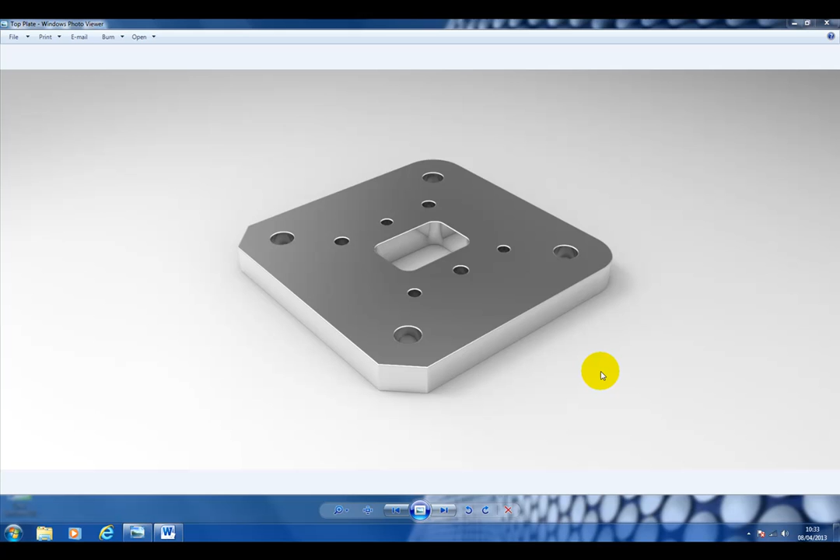The top plate is another really simple part that we're going to model, and we're going to use the hole command to model these holes. The holes, although they look similar, are different. This hole and this hole are M5, so they are tapped holes. And this hole and this hole are just straight 5mm holes.

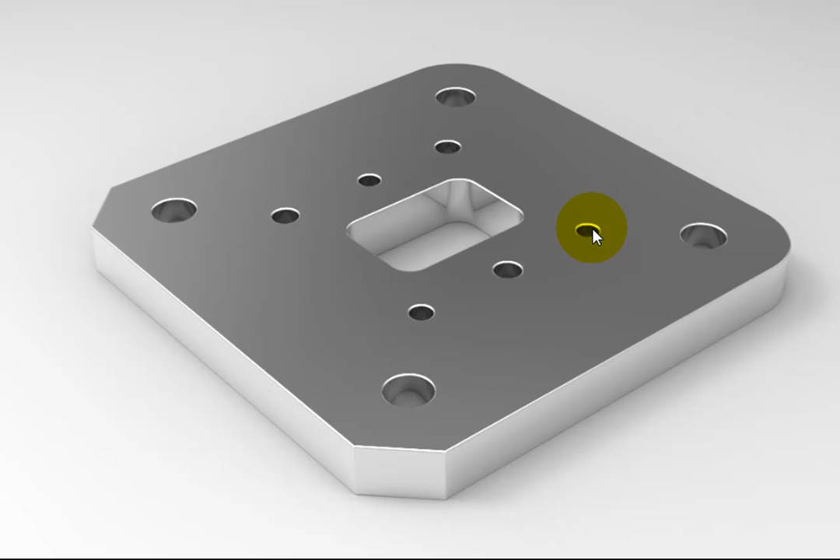We'll do this by using the hole command to produce one hole and then pattern it 6 times. Then we'll tell Creo that we don't want to use this hole and this hole. We'll do the same again for these following 3 holes, but this time we'll create this hole, pattern it 6 times, and tell it not to use this hole and this hole. We can then come back in and just create this straight cut through the center and put some rounds in the corners. Let's start Creo.

Make sure you select Creo Parametric. Once the program's started, maximize it.

I'm going to set the working directory. Select working directory, navigate to where your folder will be stored on the shared area. Mine's saved on the desktop. Select the press plate folder. Again, don't expect to see any parts in here, and these 3 folders I've got on here are just for creating these videos. Say OK to it.

We can now go to Open. Select the top plate and say Open. And it should open looking like this.

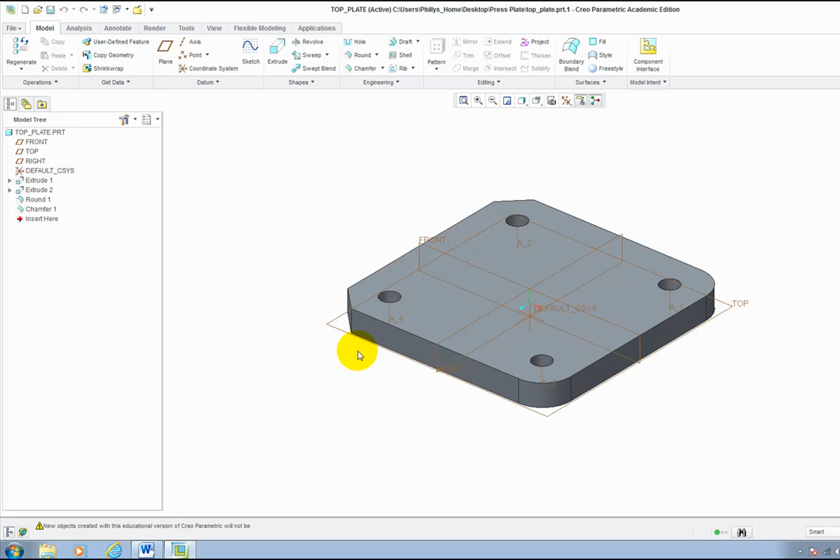Let's spin the part over so we can see it in a plan view. Go to named views and select Top. Scroll down if necessary, and then refit to the screen if necessary.

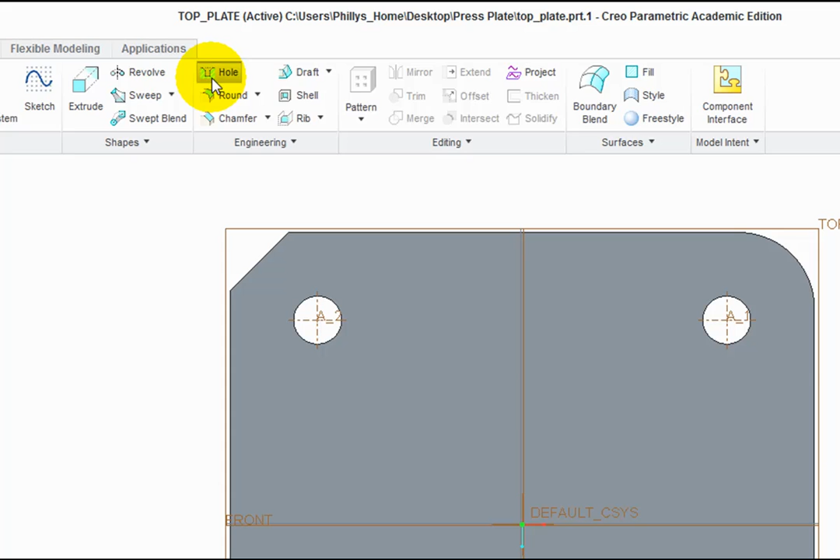We'll now put the straight holes in. Let's go to the hole command, select it, move the cursor down into this top quadrant here, and left click once just to position a hole. Again, you'll see we have the 2 green grab handles. I'm going to click and drag these.

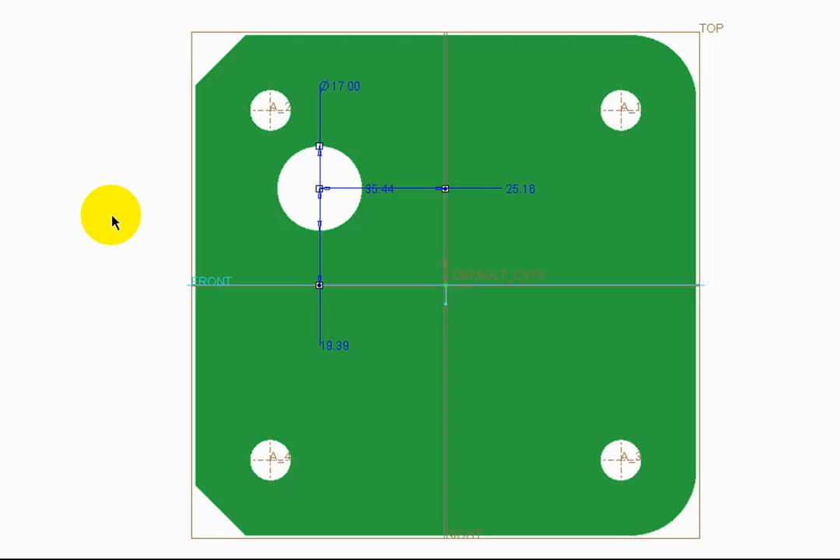Select it. I'm going to bring one down onto the horizontal datum plane. Select the other one, click and drag it, and bring it across to the vertical datum plane. I'm just going to press and hold on the wheel and move the mouse forwards to put the plate slightly on the angle so I can see what I'm doing. These holes should be offset from the reference or datum planes by 20mm. Hover over the value, double click it, change it to 20, and enter. Do the same with the other one.

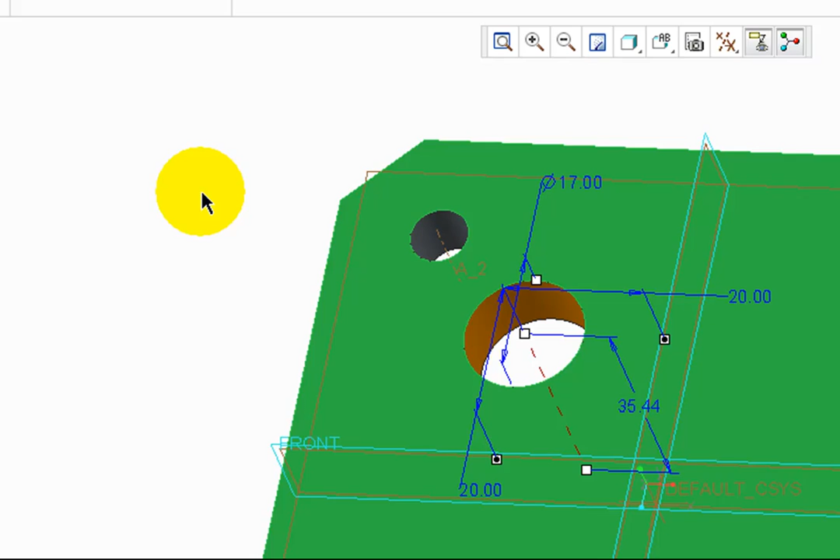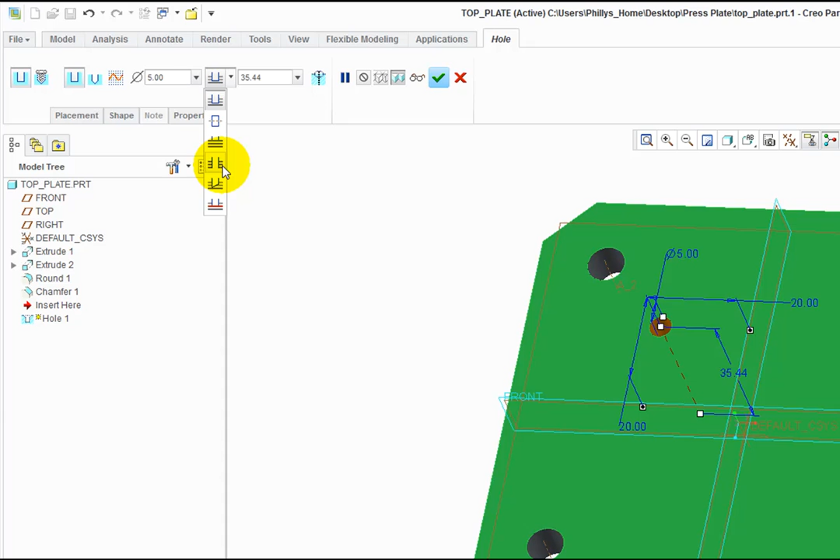We can then go into the dashboard to set all the other settings. It wants to be a simple hole, not a tapped hole. It wants to have a diameter of 5mm. Enter. And it wants to go all the way through the part. Green tick to accept it.

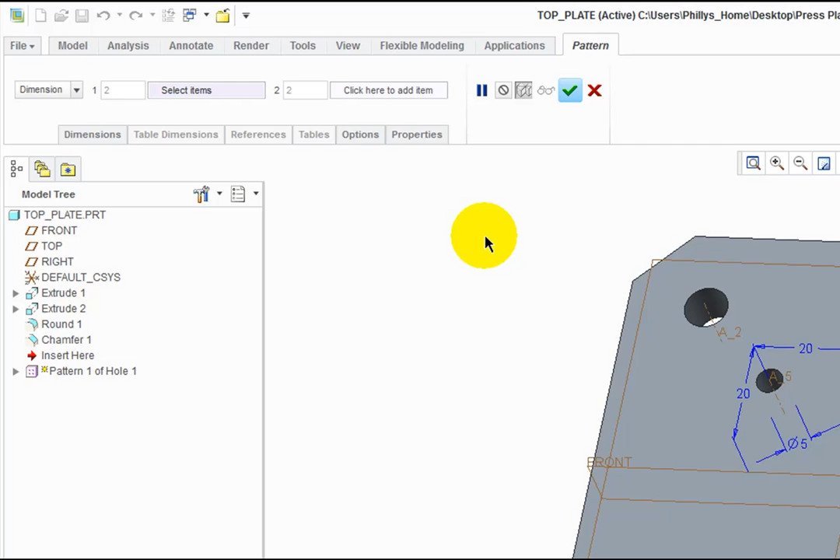While it's still selected, the pattern command is active. If not, select hole 1 in the model tree and then select pattern. We're going to change the type of pattern from a dimension pattern to a direction pattern. Select it.

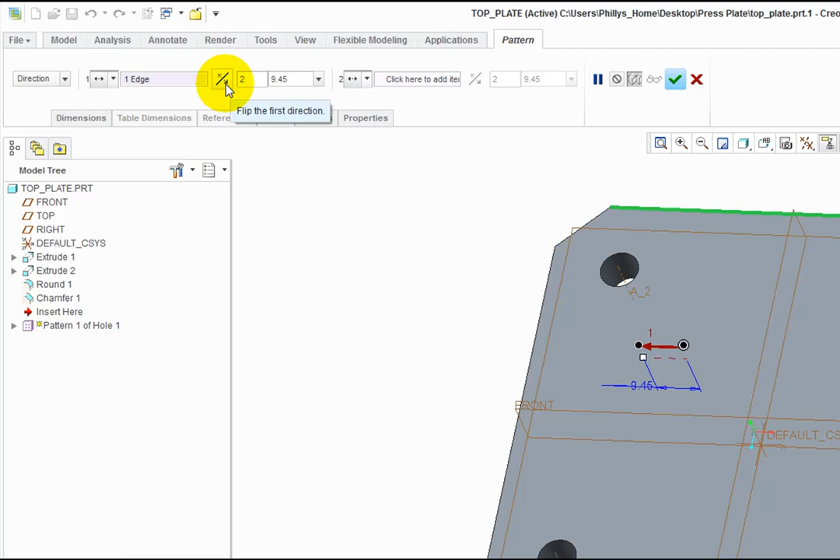This time we're going to select the direction that we want the pattern to move in, so I'm going to select this top edge here. If you go to the double-headed arrow, you can change the direction of the pattern if necessary. I want my pattern to go in this direction, to the right. I want them to be a total of 3. Enter. And I want them to be spaced at 20mm.

This gives us the 3 across the top, but I also want 3 that are down below here. So we can now go in and put another direction in. I'm just going to click into this box here to tell it I want to put another direction in. This time I'm going to select one of the vertical edges.

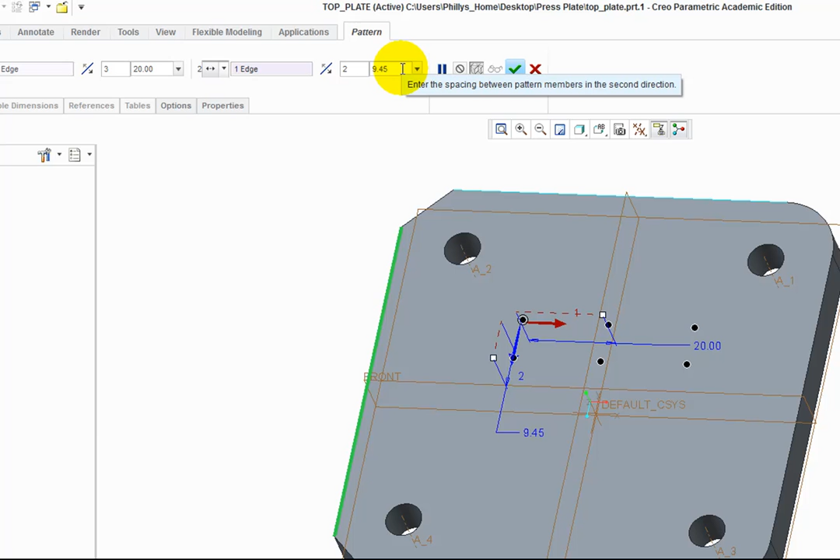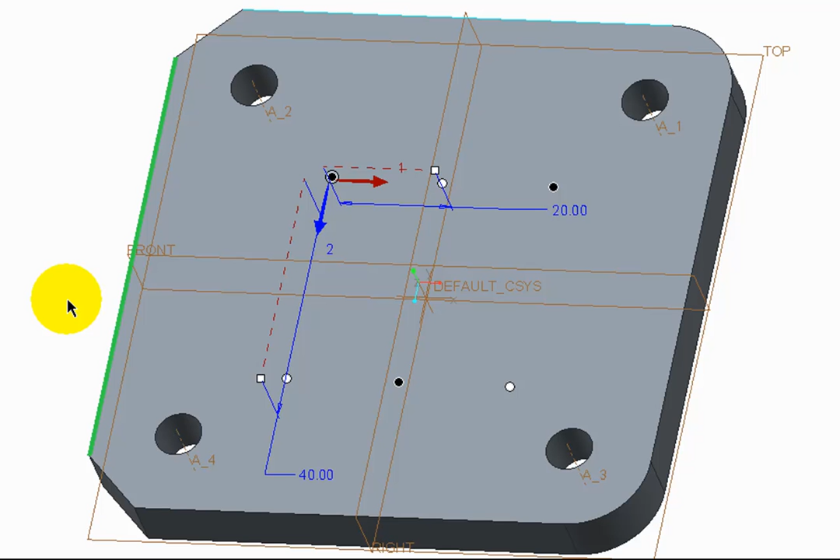Leave the number of repeats to 2, and this time change the distance between them to 40. This will give us 6 repeats, but I only need 3 of them. This is the simplest way I could think to do this. So I can tell Creo that I don't want to use this point in the center, left click onto it, this point down here, left click onto it, and this point down here, left click onto it. By selecting them, I'm telling the program that I don't want to use these points. I can now left click onto the green tick and click away in space to see what I've got.

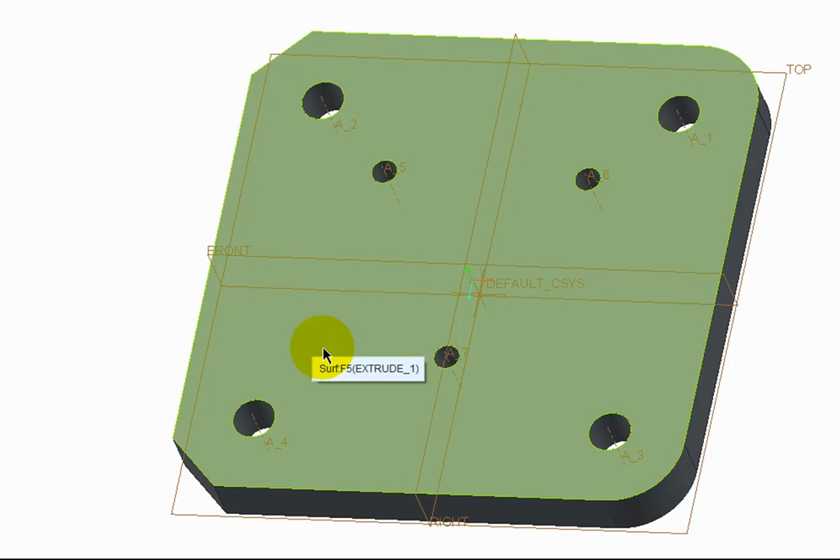So let's now come back in and do the tapped hole. Select hole. This time I'm going to come down into the bottom left hand quadrant, select it, get my grab handles again and drag them up to one to the horizontal datum plane, select the other one, click and drag it and put it onto the vertical datum plane. Again, change the values to 20 mil.

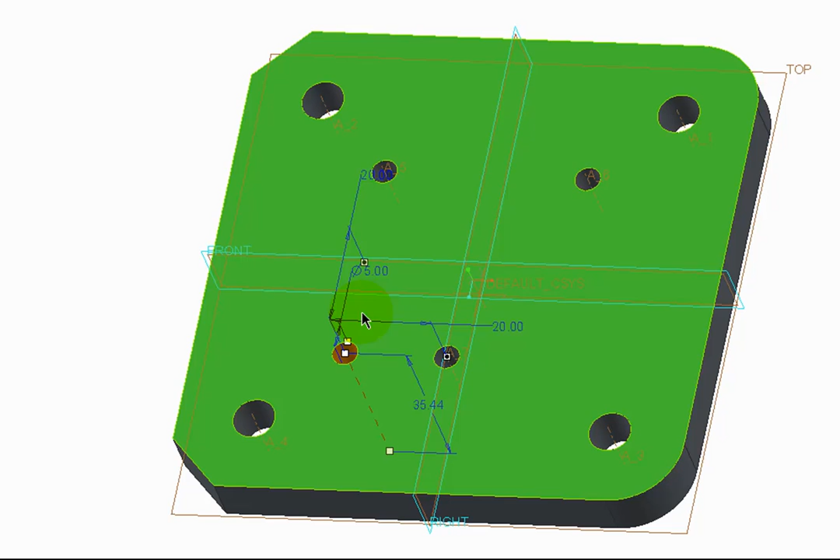Now go up into the dashboard to change what type of hole we need. We want it to be a tapped hole, select it. I'm just going to click onto shape so I can see what we're doing. I'm going to tell it we need it to be an M5 hole. Scroll down to it. It wants to be M5 by 0.8.

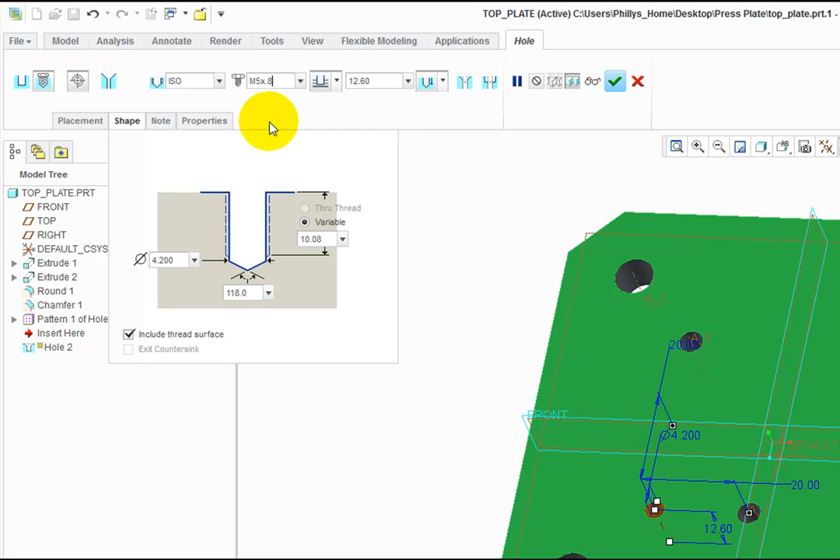I'm going to tell it to go all the way through the part. I need to tell it that I want the thread to go all the way through. Click on the green tick to accept it. While it's still selected, we can go to the pattern command. If not, just reselect, hole 2.

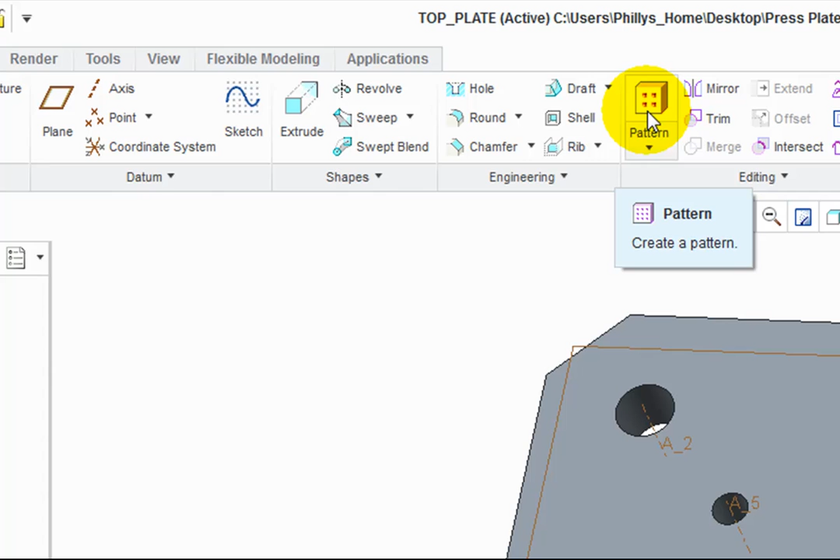Change the type of pattern to be a directional pattern. Select one of the horizontal edges to tell it we want to go left to right. Change the direction if necessary. Change the number of repeats to be 3. Enter. Change the distance between them to be 20 mil.

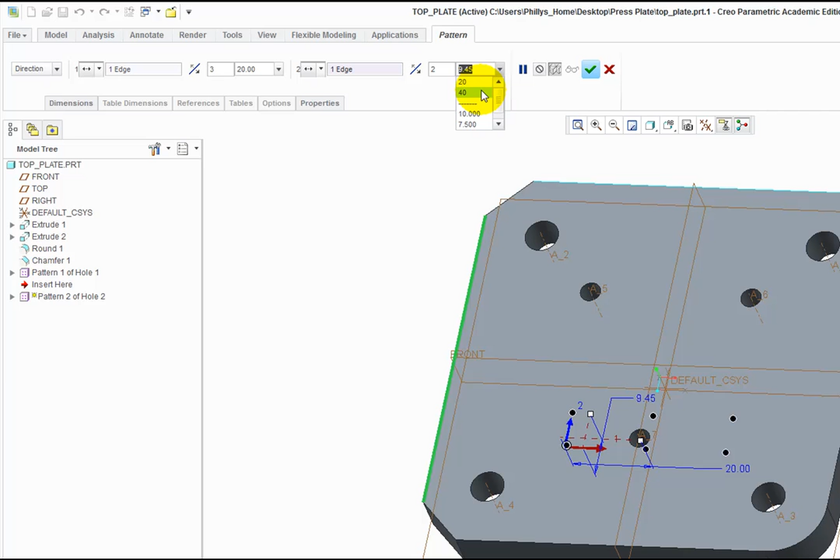So now tell it we want to put a second pattern in the vertical direction. Click into the box, select an edge, change the direction if necessary, leave the number of repeats to 2 and change the value to 40. This time deselect this hole, and this hole. Green tick to accept it.

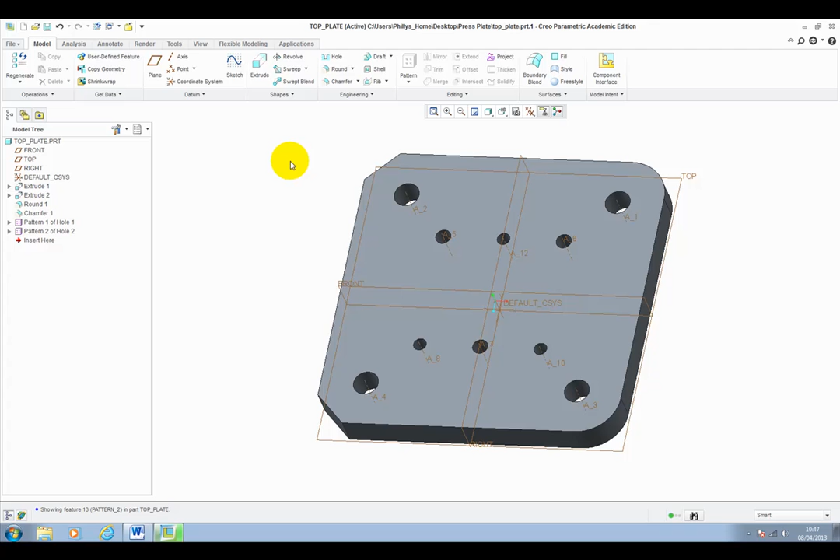Click away in space. Press and hold the wheel and move the mouse so you can view the holes. Return it to trimetric. Refit to screen.

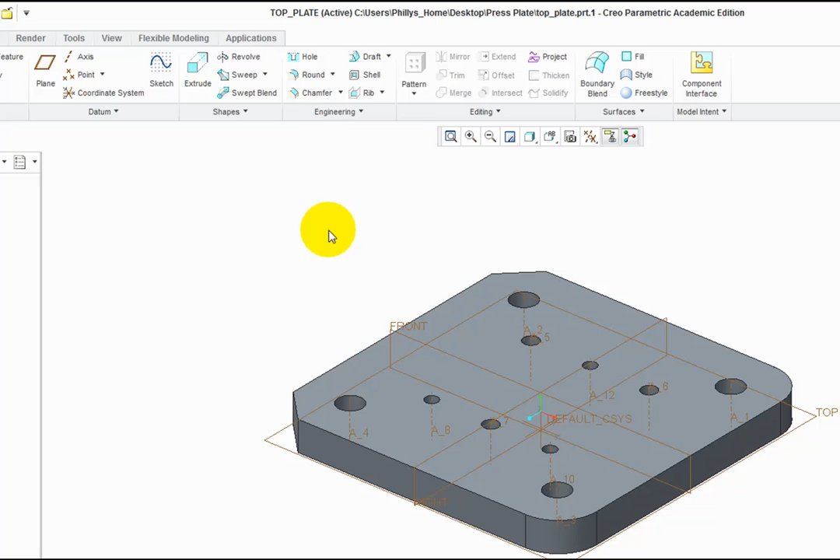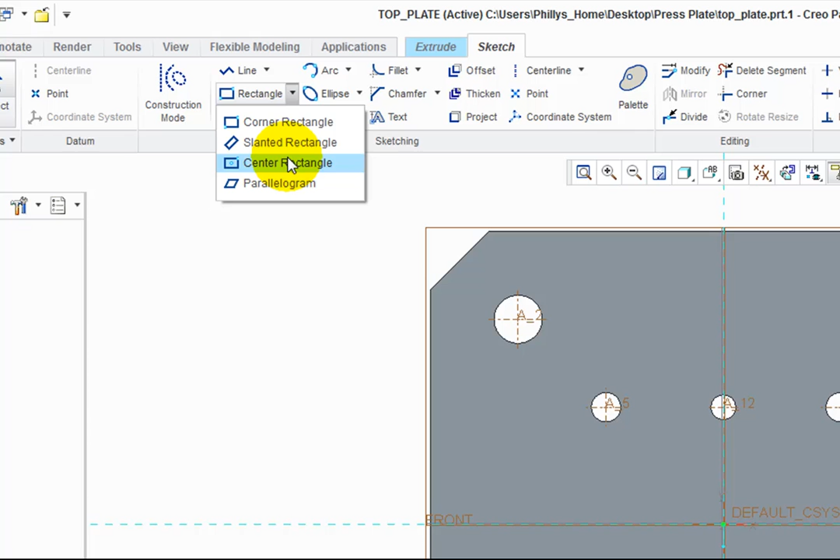So now come up with the square hole in the center. Go to extrude. Select top surface. Spin onto sketch view. The hole is just a simple rectangle. Just go and select rectangle, but change the type of rectangle to be a center rectangle. Let the cursor snap to the intersection of the 2 datum planes.

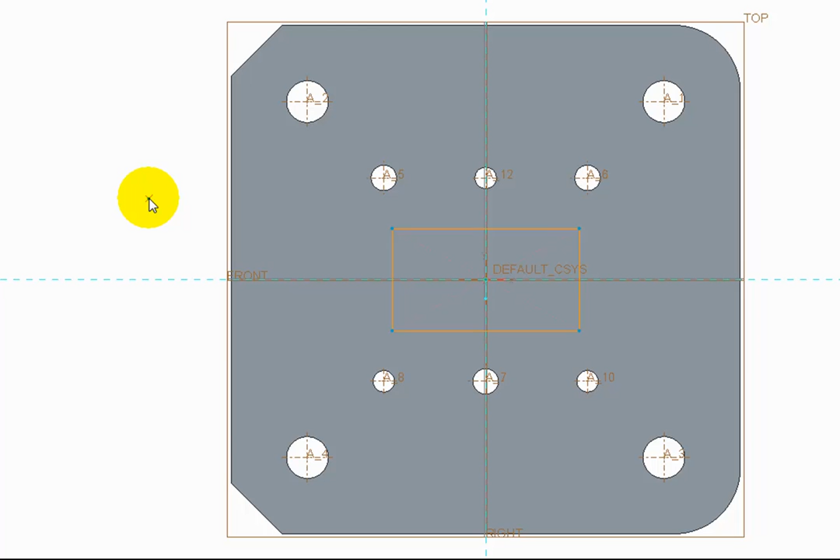Left click once to start a rectangle. Move the cursor out and left click again to complete the rectangle. Move the cursor into space and middle mouse. This will give us some values and some dimensions. Change the dimensions to be 20, enter, and 40, and enter. Green tick to accept it to take us back into the 3D environment.

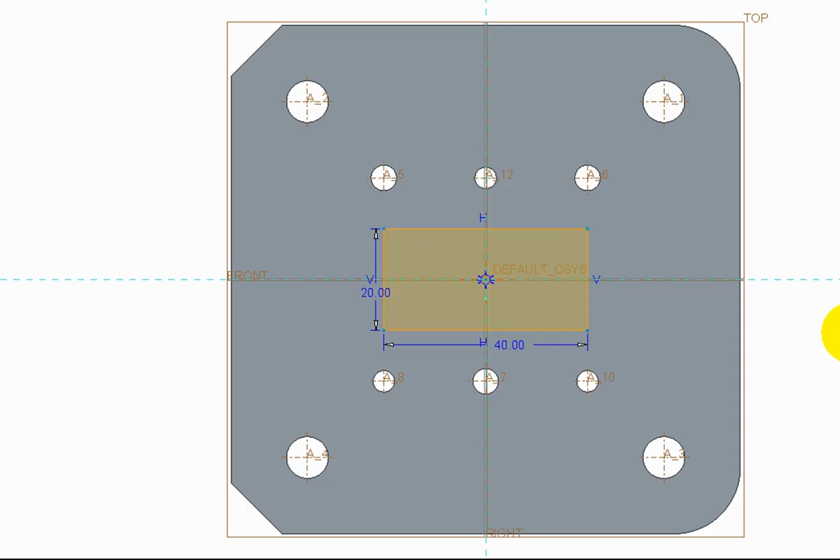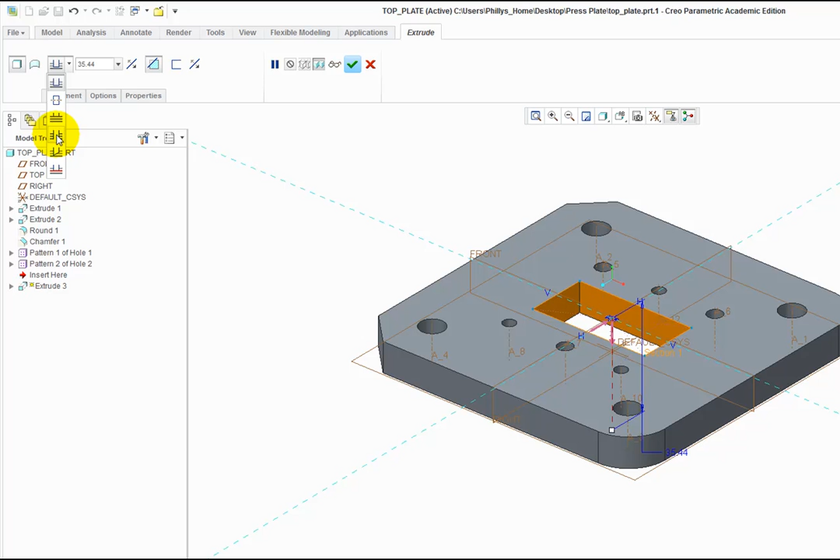Spin the view trimetric. Tell it we want the extrude to go the other direction. Make sure it's removing material. Tell the extrude to go all the way through the part. Green tick to accept it. Click away in space to deselect everything.

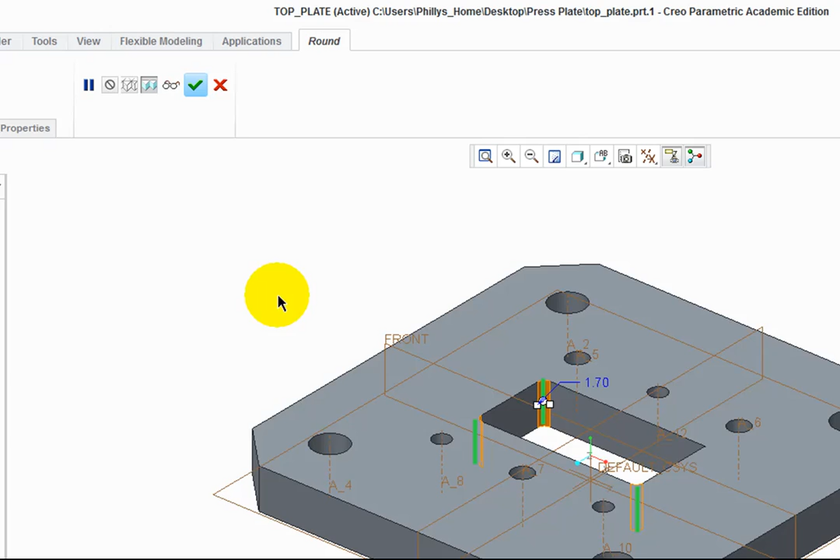Let's then just come and put a fillet in the 4 corners. Select round. Select the vertical edge. You can either hold the control key down and just move to where the edge would appear, left click onto it. Move to the next one. The green edge highlights, left click onto it. Or you can release the control key, press and hold the wheel, rotate the part over, then reselect the control key and select the final edge.

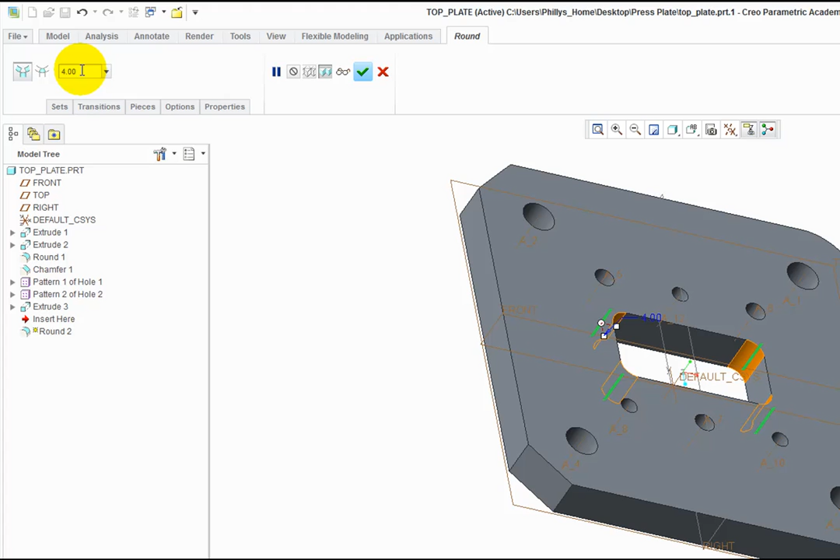These should have a radius of 4. Enter. Green tick to accept it. Click away in space to deselect everything. Change the view to trimetric. And refit to screen.

Let's now save the part. Go straight up to save. Click onto the save icon. And say OK if necessary. This completes the top plate.